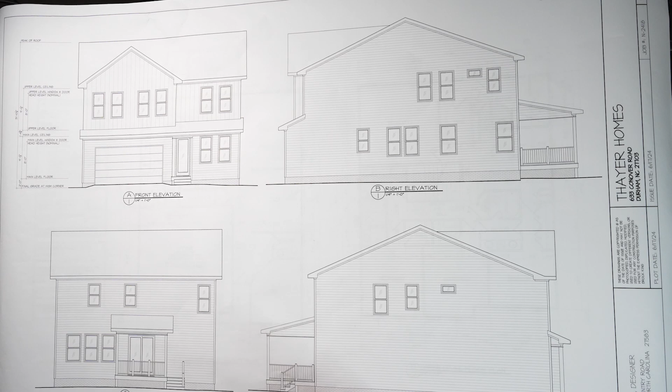This is a set of plans in Durham that we're getting ready to build. We have 3 single family homes and then we have 4 attached homes, so basically 8 units down on the other end. So all 11 of these homes are gonna be somewhat similar. They're gonna have the same garage door, same front door. We're doing brick on the foundation on the front, brick stairs, which I'm gonna note a few of these things. But then on the sides, in the rear, we're not going to put brick.

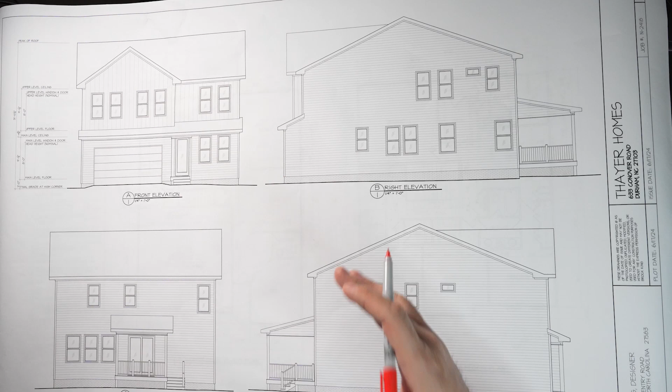So I'm gonna go through this set of plans and I'm gonna redline it, mark it up. Some things that we kind of changed after we did architecture. Now we know exactly what we wanted to do. We've priced it out. These are the changes that we're gonna add in here. So what we're doing is a craftsman style door. So I'm just gonna kind of draw in there that we have craftsman style doors.

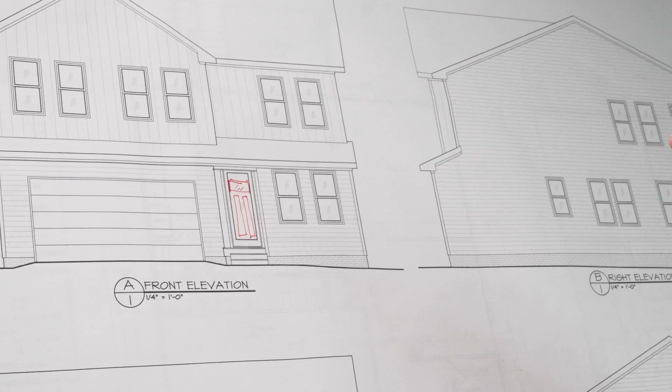So the glass will be right here, and this will be panel. Just so, you know, they're gonna have a selection sheet on that. They're going to see that it's a specific door, but I want everybody to be able to visually see it as well. I also want to make the trim a little bit heavier in the front.

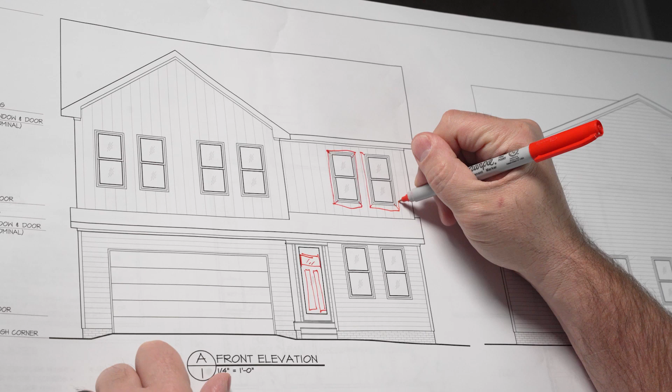So I'm just gonna mark a couple of these windows and I'll just put arrows to make sure that we are going to put a 1x4 trim. It has it on these plans, but it's not wildly visible and doesn't really stand out.

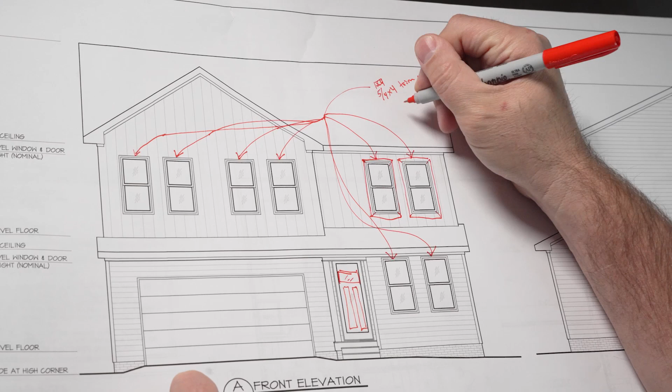So I'm gonna say on here 1x4, actually, let's change that to 5/4 by 4 trim on front windows. Because I don't want to put shutters on here, but I want to give it something. So we'll put that detail.

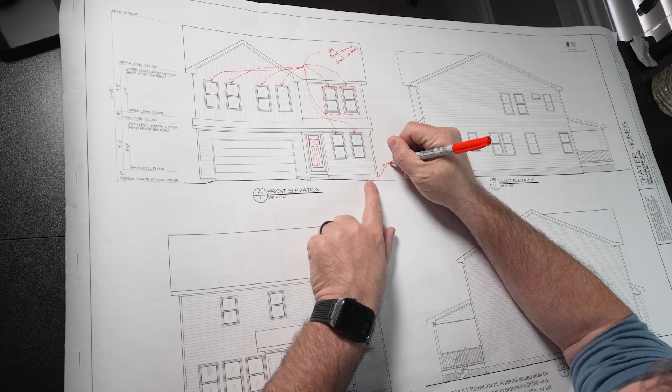I'm going to be doing something with the garage door, but I'm still waiting to get exactly what they selected to get a picture of it. All I have is a SKU, so I'll kind of draw something in there later. So I'm going to notate on here brick foundation, front only. Just put a couple X's on here.

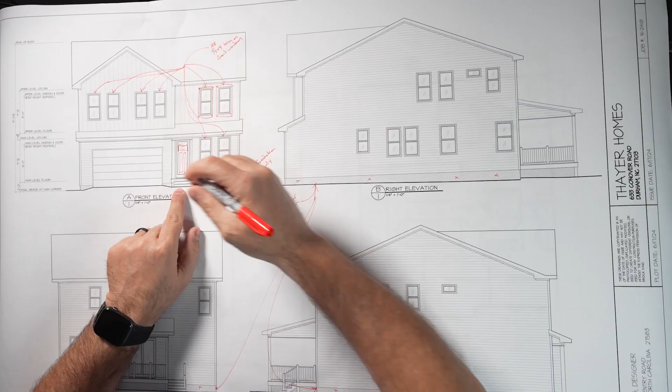On the rest of it, I'm just going to note on one area, and rear if I really want to be excessive. Then I also do want to note that this shows more like a decking, and I want to note that stairs, brick.

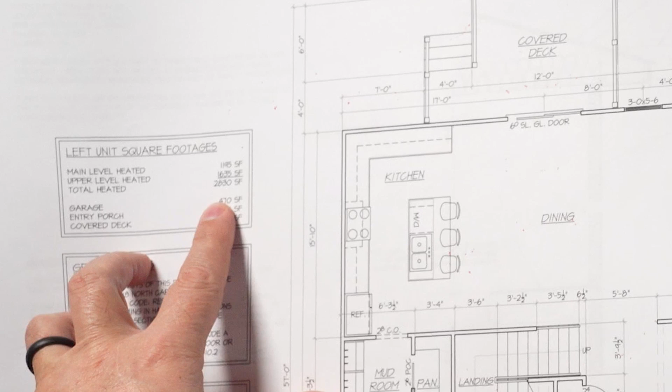So we've made some changes where in the past we would maybe run a chase in the master closet, maybe take the corner of these 2 closets, somewhere, we would chase it up into the attic where we would put our unit up there, bring our ductwork down, because this house is only 2,800 square feet. At 2,800 square feet, I can get away with just 1 unit, and we're gonna put a heat pump in here, so it's gonna be all electric.

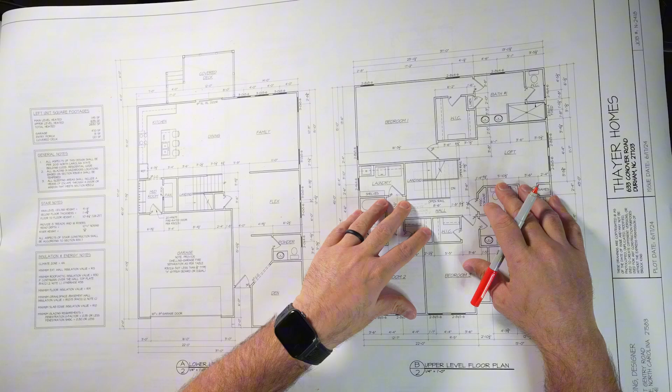And what I do is, if it's in the attic, I will duct down to between the 1st and 2nd floor. In between these floors, I have open web trusses. So if I get it down there, I can get into those open web trusses, and we can drop all of our supply lines and our returns down into the 1st floor. And then from up here, basically all our supplies will be in the ceiling here, and our supplies will be in the ceiling here as well. And the returns will be in the ceiling over here on the 2nd floor.

Well, in this case, now doing the HERS program, one of the things that's going to give me higher rebate money is to make sure that my unit is in a conditioned space. So if I go with plan A, the way I typically do it prior to working with this energy efficient program, then I would have to spray foam my entire roof deck, and that's going to add probably another $5,000 to this size home at least. I haven't really priced it out, but it's easily $5,000 I'm going to be adding to this.

Well, something I do standard regardless is in my crawl spaces, I do a sealed crawl space, and then we condition it. So we drop a supply down there and we condition our crawl space. So if I'm already conditioning one of the two, I might as well not have the extra expense by putting it in the attic, but instead we'll put our unit into the crawl space.

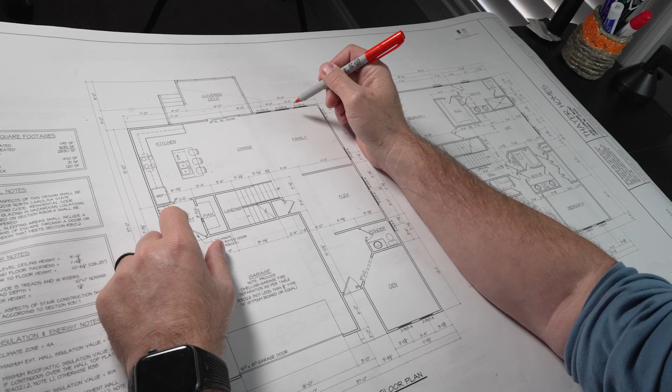All of our supplies are going to come through the floor on the first floor. It'll run up the chase, go into the open web floors, and it will go through the second floor. Then I will just need to figure out an area to be able to get a return in the wall, because we're not going to have a return in the floor. So that's kind of the things I want to start to design. And we could do a lot of this stuff on site, but I want to prep a little bit now.

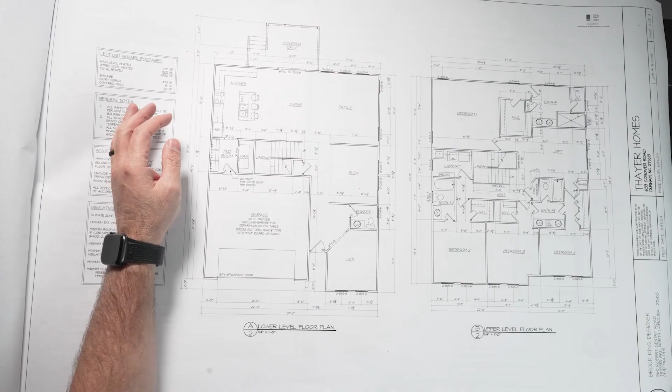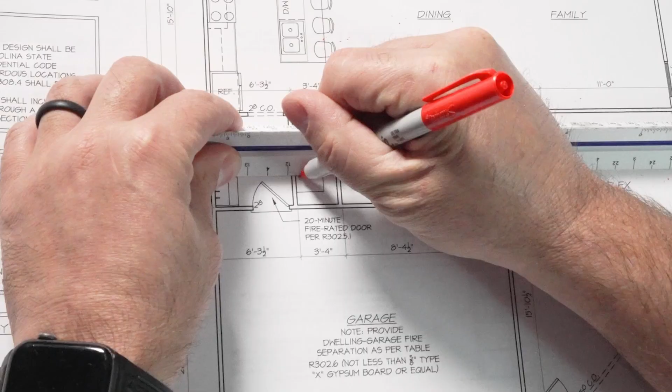And looking at this plan a little bit earlier before I started this, I was thinking this pantry is enormous. It's 7 feet by almost 3.5 feet. So I can take 2 feet of this pantry and have 2 foot by 3 feet and go ahead and duct this right here. Block this off, and this could be a chase. So then I still have a 4.5, 5 foot pantry, which is plenty enough.

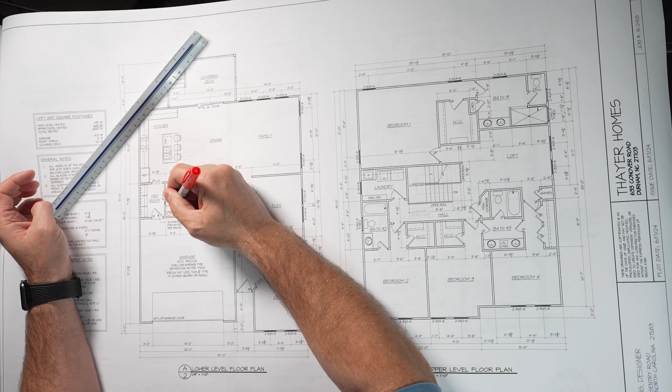And what I'll probably end up doing is putting a small set of shelving right here, because I don't have a lot of depth right here. So I'll probably end up with small shelving right there, and that could be a place where you can put cans, spices, whatever, on this side, and all your bigger stuff will go on these deeper shelves right here. If we have a chase right here, and then we have the garage, on the other side of the wall of this chase, we have the space underneath this landing.

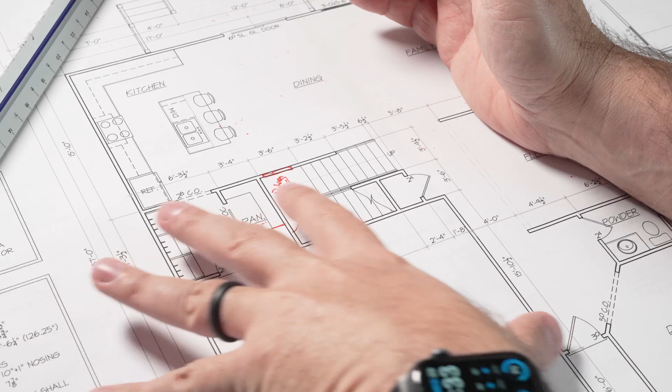Okay, so then we could end up putting a return in the wall right here. They could put a return right here, and I'm just giving suggestions to the field. When they get to the field, they might find a little bit better solution, but I think this is probably the best bet. It puts a return to this nice open space right here, but at the same time, I don't want to lose all of this space under this landing.

So I want to figure out how to utilize some of this for storage, because another thing I'm going to redline in here is an access door. Okay, so when I have an access door from the garage, I'll end up conditioning all of the space underneath here, but I want to be able to have more storage space. I hate losing all of this space.

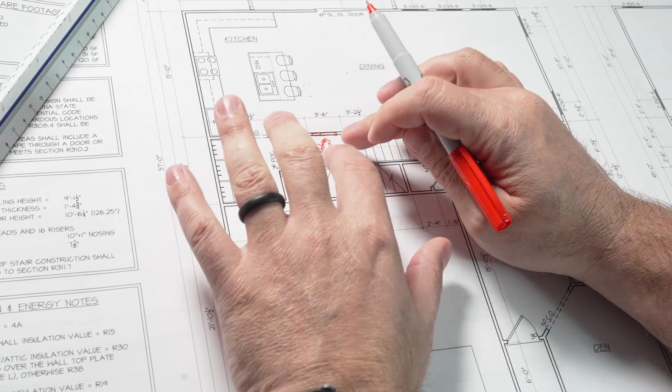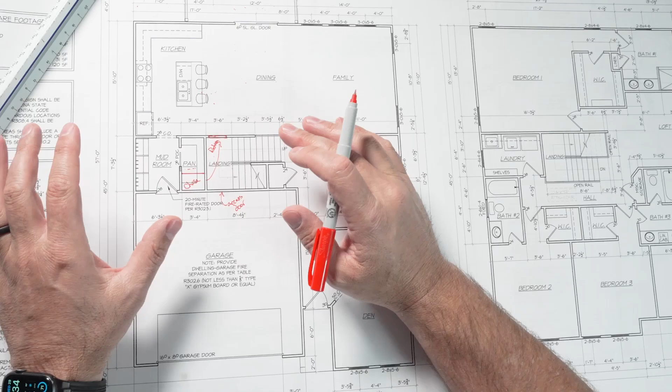So if we're gonna have a duct, maybe we can bring the duct up high and run it underneath this landing, drop down and go into a return. That way we could still utilize all of this space underneath the stairs for additional storage space. This could be a good place to put your holiday Christmas stuff, right? Utilizing all of this space when you can is always a good idea. Buyers love it, okay? So that's one of the things that I'm gonna prep here to make sure that we know that the unit's going into the crawl space.

So I'm gonna put also a note here: HVAC unit in sealed, conditioned crawl space. Another thing I'm noticing here, it shows a cased opening. I do not do cased openings, so I'm gonna cut that out. I like to have it cleaner. I don't like these headers separating rooms unless I have to.

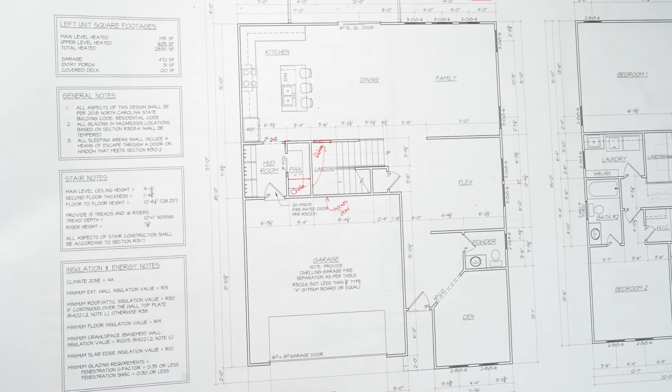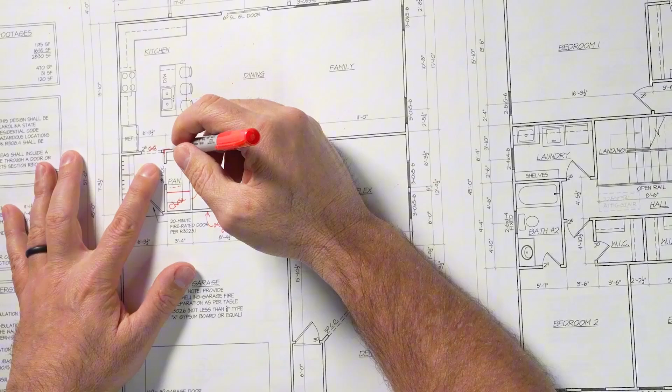So before I get too far ahead of myself here, I'm gonna jump over to my structural plan and just see, and it just has a standard header there, but I can take that. Yeah, there's nothing really affecting me from being able to do that. So I can run all that up above in here. So I don't want to put a cased opening here.

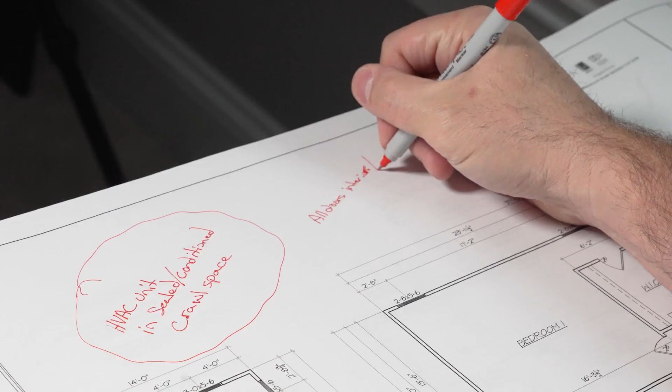So I just want this to be an opening, meaning this ceiling will continue to flow across instead of hitting a header, dropping down, and instead of having this little bump out right here, I'm just gonna have this all be smooth and open. It makes for a nice cleaner look in my opinion. I'm also gonna make a note here that says all doors, interior and exterior, 8.

I'll just put 8-0, so 8 foot tall. All my interior and exterior doors, I do standard 8 foot. So this shows a 6'0" wide sliding door. It's gonna be 6 feet wide by 8 feet tall.

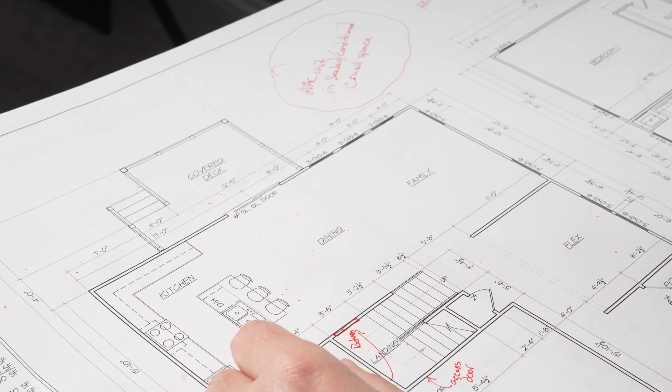Another thing I'm going to add to these plans later, all of my window rough openings. I'm still waiting to get those back from my manufacturer. So even though it says a 2046, 3056, I want to know exactly what my manufacturer of these windows says I need to frame these windows to. So if this is a 2.0, it may say it's 24 3/4 of an inch by 52 3/4 of an inch, for an example, right?

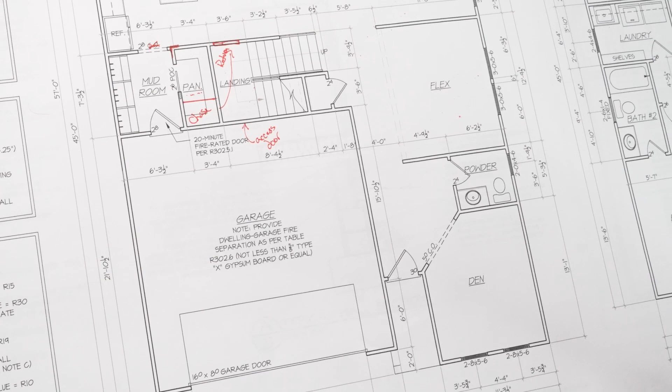And that way when the framers get them right, the project manager checks the openings before the windows show up, they can put everything right in the hole and they don't get any delays and have to come back. The problem with that is it's gonna slow everything down, number one. Number two, let's just say they can't put these 2 windows in because these 2 windows were framed based on this instead of me getting exactly what the manufacturer requests.

And then these 2 windows are just sitting in the house, making it susceptible to somebody coming and stealing those windows, or maybe they're just sitting in the garage and somebody could steal those windows. I want these windows dropped and installed on the exact same day, therefore I don't lose any windows or doors. So I want to make sure that I have that. I will have a note right here that says all my window rough openings.

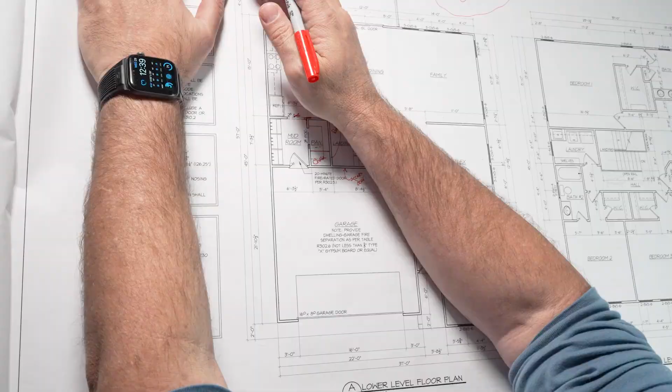Doors, it doesn't matter. This sliding door will matter, but these doors are gonna be standard. Any kind of exterior doors, which I just have this one front door, this door right here, I will get a rough opening on that. So I will mark that over here on the page.

Now, other things I wanna look at: when I was talking to the designer, we just kind of have this flex space and then we have a den. Like, what do we want to do with this space? I've gone back and forth with this whole thing. Do I want to leave this as kind of an open area? Do I want to put a wall? So what I decided to do is just go full wall, and then this will have a header going across.

And if the buyer comes in and they're like, no, I want to close this room off, make it a separate room, they can do that. They've got a header, so they just need to frame down from that point, maybe add the door they want to put in there, the door opening. So I'm just leaving this like that. I think that's pretty much it on the first floor that I see as far as framing details that I want to put in here.

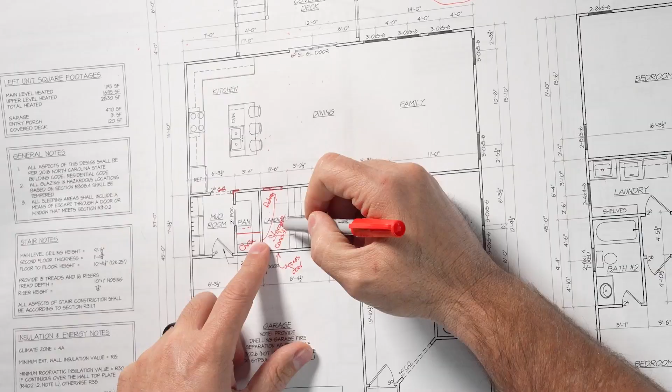If we have an access door in here, I want to note that this is going to be for storage and to condition with insulation. I'm not going to put supplies in there, but I want to make sure that this is all insulated inside here, because normally they would stop the insulation right here. Since we're kind of opening this, I want to make sure that everything is insulated in there.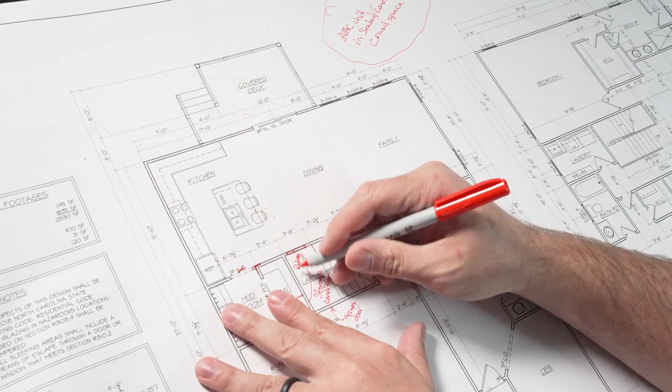So because of that, we'll have a wall right here, and we'll probably just stop it right there. If it doesn't need that wall right there, maybe I'll bring a wall right in here, because once we get in here it gets too small. So I'll put a wall in right there, insulate in here, and drywall inside here to just kind of finish it off as storage. Not gonna paint it, not gonna put flooring in there, but I just wanna get it to at least that point.

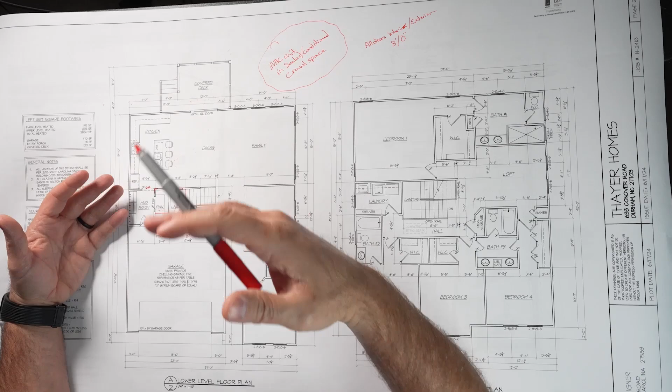The last thing that I wanna look at is my window placements and quantity. I wanna make sure that, if we were putting furniture in here, we have to imagine living here, how everything's gonna lay, making sure that we've got enough wall space for certain things, having enough light, but at the same time not having too many windows, because a lot of extra windows is just additional cost.

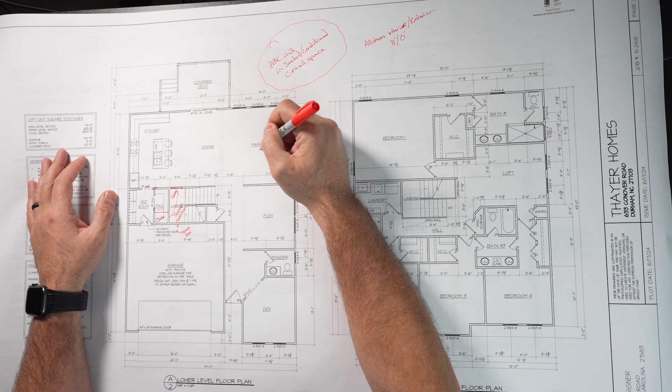So sometimes I'll come through these and I'm like, oh, I don't need this window, this is important, and I'll take windows out. And I've already done this with this plan once, but I just want to look one more time. So family room, I want to have some good light in there. The kitchen, we want to have some good light. Since we don't have any windows over in this area, we've got this big glass sliding door right here.

So you should get plenty of natural light in here. We're going to have can lights, but I want some natural light. We have 5 windows, lots of glass over here and over here. We just don't have anything over here. But I also want to have enough wall space to be able to, you know, I imagine that the furniture, couches, and I'll face this direction.

So this is going to be what we call the TV wall. So I want to have enough space. So I have 10 feet 8 inches from center to center window. So let's just call it maybe 8 foot in between there. We have plenty of wall space.

So in here, we're bringing a twin window right here, single window in this powder room. We've got 2 windows up front. I don't think I want to add or delete anything. I'm good with the first floor. I'm just going to pick that up while we're talking about windows on the second floor.

The master bedroom, you always want to have a decent amount of light, but at the same time, you want to think of headboard wall, TV wall. If I put the headboard wall here, we've got this one window right there. It gives us 3 windows. This is a pretty big bedroom right here, almost 16 by 16. A little better than 16, a little less than 16 here. I want to have headboard wall, TV wall, good natural light in this area. So I'm not going to change anything there.

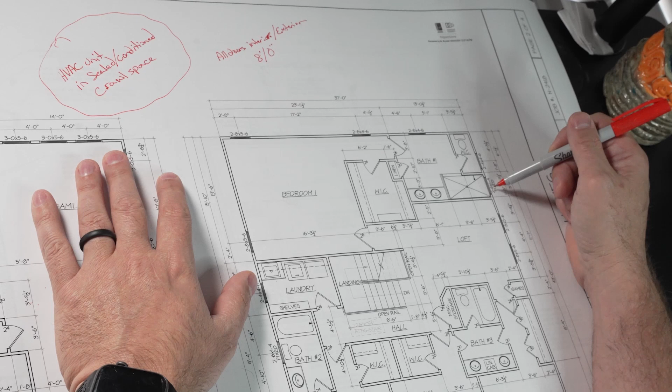I'll make a slight adjustment because we've got 3 foot. Yeah, I'm going to make a slight adjustment here to make sure that we have 6 foot from here to here. I'm going to say 6 foot 1 inch for framing. Okay, so if we have 6 foot 1 inch, once I put the drywall in there, half inch, now we have 6 foot. So I want to have a 6 foot vanity in here to give us a little extra space so 2 people at this area right here don't feel like it's crowded.

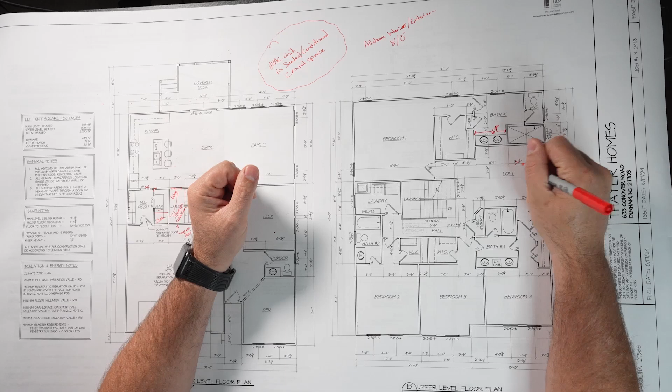So I can shrink this shower slightly, which the shower is huge. It's 7 feet big. As a matter of fact, I might want to add a little bit more and go 6 foot 4 inches to give me the 1 inch for the drywall and a 1.5 inch fill on each side to give me a clear 6 foot vanity. So I'm making that little note. We can shrink this shower a little bit, but that gives us an idea where this wall is going to go. So I'm just going to cross this out so that they reference this right here.

Okay, we've got an open loft area. We've got 2 windows in here. And then the front, is this excessive with windows for a bedroom, having 2 windows for each one of these bedrooms? Yes. I mean, you only need one window, but this is the front of the house. So I don't want to mess with the elevation because this particular elevation, that was the look that we were going for. So I'm not going to take away from there.

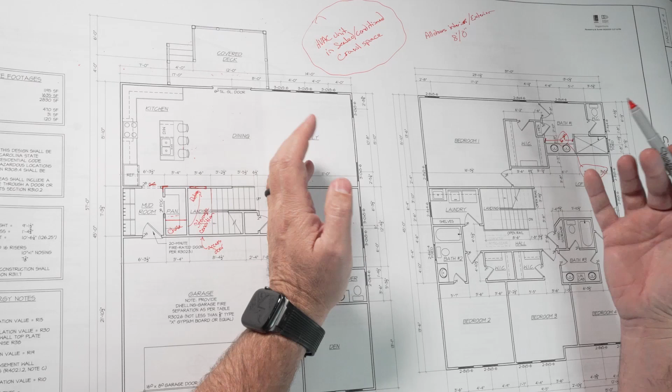We have a transom window right here over the toilet area, which will bring some good light into this bathroom. A lot of times they don't even put any kind of windows in this bathroom. I like to give some light in every bathroom if I can. Obviously we can't do this interior bathroom. Laundry, we have a small window, and then we're right back to where we started. Going through this, I want to look at things like door swings, make sure everything kind of feels good.

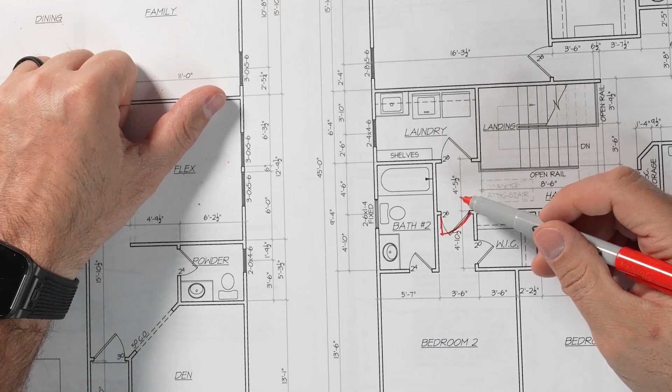I'm going to reverse that swing and have this lay up against this wall. So it won't change anything with the size. That one lays into this wall. So like right here, this door actually could be slightly kind of in the way of this door. And I don't like doors competing against each other, but this door can lay up against this wall. This door is gonna lay up against that wall. This lays against that wall.

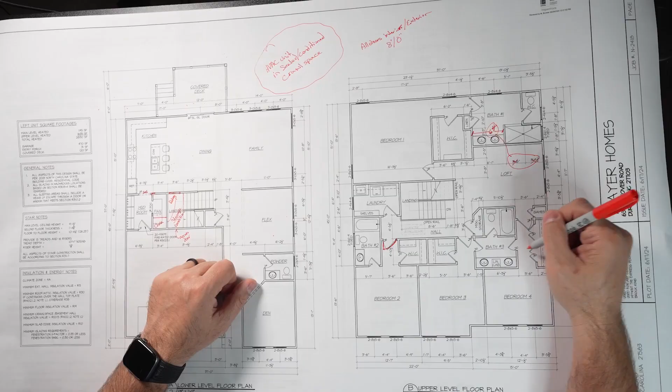Now here I have 2 doors, so I'm gonna leave this one like that because otherwise I'd be right in front of this one if I opened it up this way. So we're gonna leave that. This one goes into this wall. We've got like a little separation. This is a buddy bath. So this bedroom and this bedroom share this bath. So they can come in here.

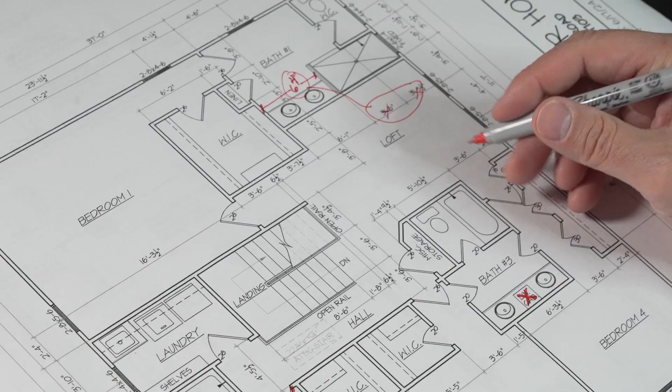Oh, by the way, no linen cabinets on top. My designer loves to put those, but I don't ever put these linen cabinets on top of the counter. I don't like those. So what I'll probably end up doing is making this more of linen. So meaning when we trim this out, I'll put shelves all the way up, and probably do the same thing with this cabinet too. It's like a loft, maybe kid games, whatever you want to call it. I'll just make a bunch of shelving in this closet as well. Nothing I need to mark right now. We've got the double doors for this bigger closet, and I think everything else is good.

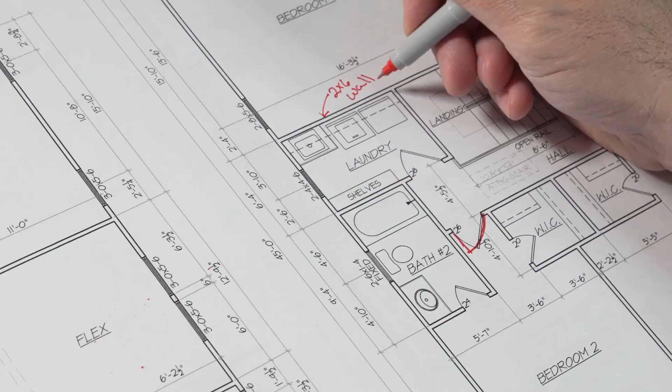This wall right here needs to be a 2x6 wall, okay? And the reason why is because this pipe for both the dryer vent and for the drain in the shower, when you've got a shower box that goes in this wall, it's big, and so a 2x4 doesn't quite catch it. So I'm gonna wanna fur this wall into the laundry room because I don't wanna bump out in this room. So I'll fur this wall in to make it a 2x6 wall. And that way we have enough space for that.

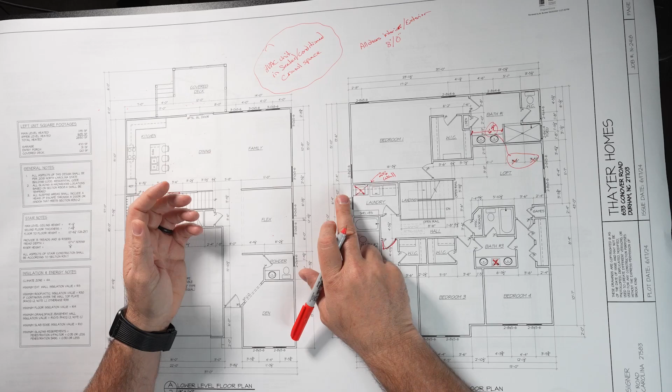This right here, I'm not doing the sink. Again, something my designer likes to put in. I usually have them write optional on there, just in case we pre-sale and we want to put it. I'm gonna say no unless a buyer comes in and says that that's something that they want, and then, you know, if it's soon enough before we do any kind of plumbing, I can do that. But right now, what I'm trying to accomplish is just kind of give them a cabinet right there with a countertop. So we have our attic pull down stairs right here.

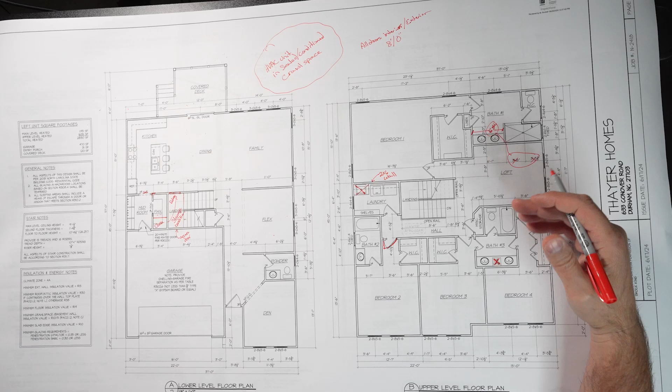So there's not a lot of redlining in here, just a few little items that I want to make sure that we catch before we start building this. Anything that might affect framing or kind of the systems that we decided to design once we went in here. So we have the attic stair door that'll pull down this way, and that is it.

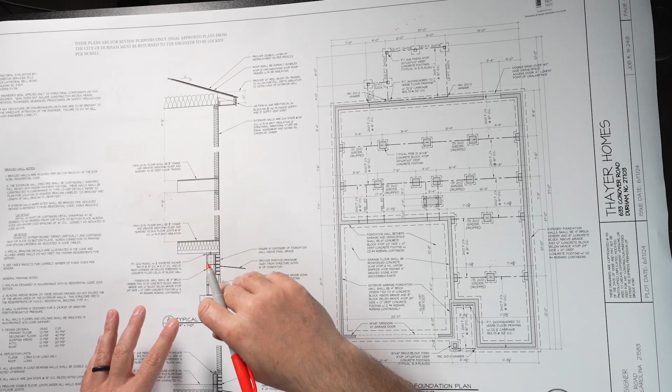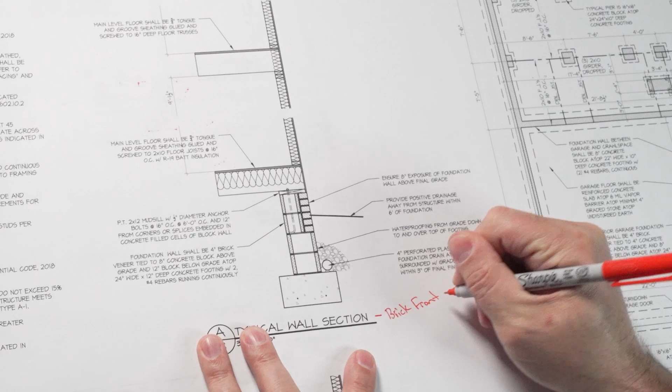Okay, next right here. So some of these details, I have a letter from my engineer, because when they come to do the inspection, if it's not per the inspection, then they'll fail the inspection. They'll say it's not like this, you need to have a letter from your engineer. So you want to make sure you're proactive, not reactive, and failing an inspection and losing time. So this detail will be typical wall section, and I'm just going to mark on here brick front only, see engineer letter.

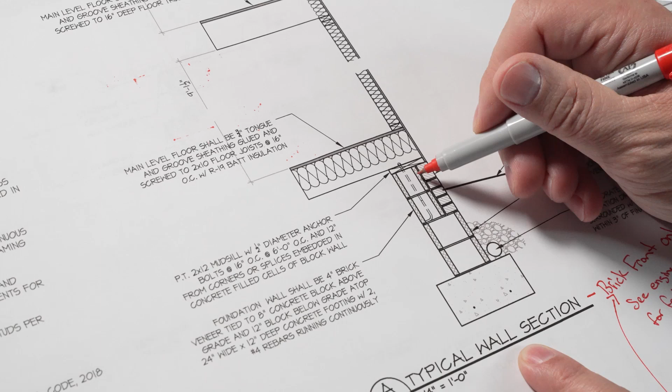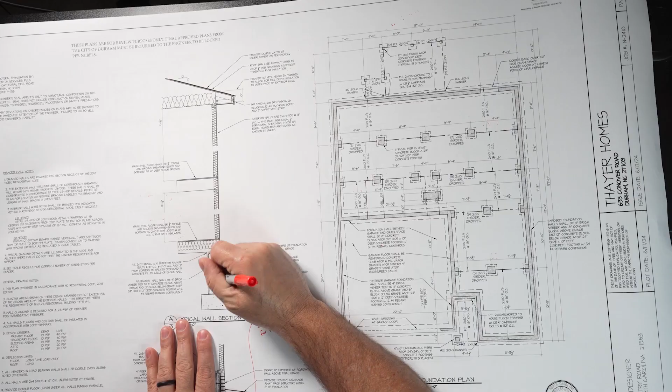Okay, yes, that's 24 by 12. I only need to have 18 by 8. So this footing can be smaller, which is gonna save me money at the end, because I don't need a 12-inch block to support the brick. So this is all gonna be 8-inch block concrete, and this detail will only apply to the front. Okay, so the other three sides, it'll just be 8-inch block coming down. So I will have this footing on the front, but on two sides and rear, it's just gonna be 8-inch block. I won't have that brick, therefore I don't need this size footing. It'll be 8 by 18.

Now moving over to our foundation plan, again, these notes will also take place in that letter. So I'll point over here too, because our footer will not be that big. Another thing is we are putting no piers in this house. So our truss company has designed a set of what's called top chord open web trusses that allow to span all the way across. And then I think it goes this way all the way through. So we will have the truss drawings to show that we don't need this, and it spans all the way across. So see floor truss detail pages.

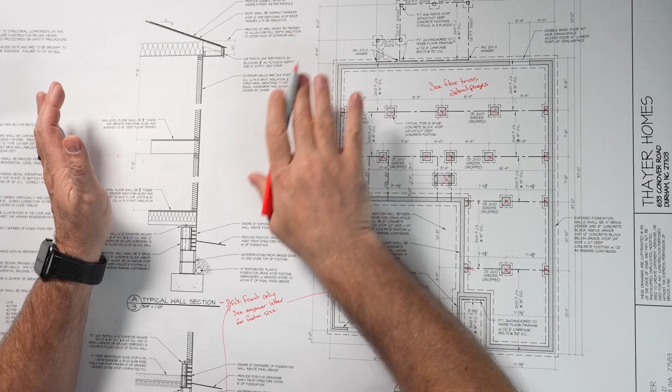I have a 10 by 12 deck with a little landing and stairs going off of there. Something I want to note here. So it says that this is going to be framing right here. That's it. I'm going to put concrete.

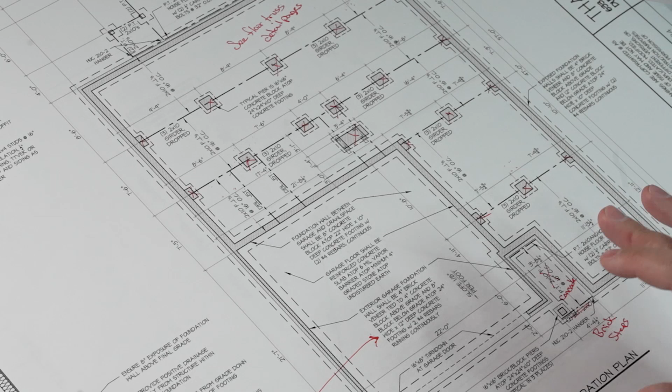So we'll have a concrete porch with brick steps. So I just want to remind from what we have on the front page there, because the framers will look at that, but then the foundation guys, they're going to be specifically looking at this page. So I want to make sure I have that detail on there for them. All that's wood, that could stay.

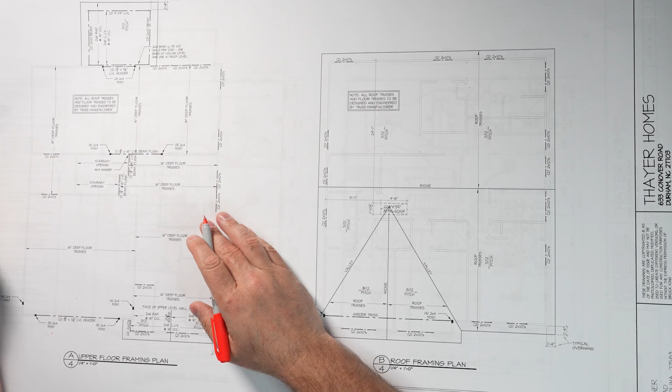Last thing is looking at structural, just seeing if there's any red flags here. Nothing is any kind of red flag. So this wall detail where we have wall on the first floor, remember that room that said flex, and then I have a header going across. Let's just say I wanted to remove all of those walls. I would have to just put a column right here.

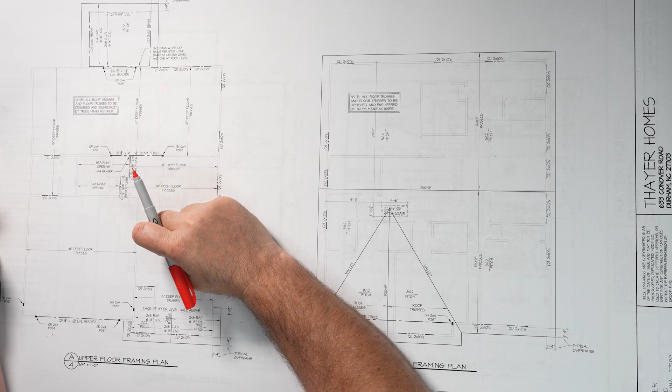Well, I wouldn't be able to move this wall because part of that is part of the powder room, but let's just say I wanted to remove that and this, or make it a knee wall, whatever. I would still have to have a column right here because I have a load point right there in that corner. So we'll just end up insulating this whole ceiling on the second floor.

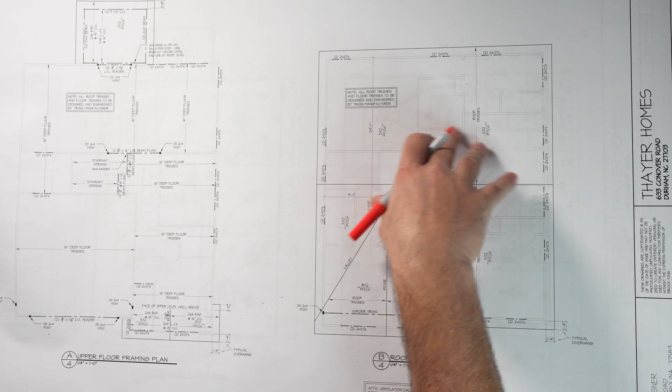Because of the pitch, because of the way this goes, this will probably all just be blown-in insulation up in the attic. So we have blown-in insulation up here, no batts. I don't think we're gonna need any batt insulation whatsoever.

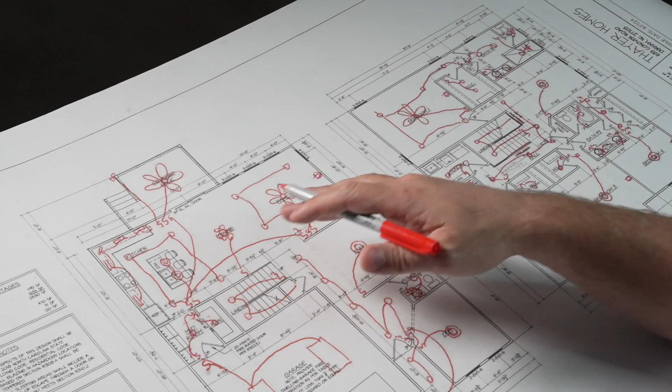All right, and then the last thing is going to be our electrical plan. Electrical plans show the switches, which light they go to. The only time we mention outlets is if it's like a TV wall and we want to put it on a specific wall. If you notice in the different bedrooms we have that TV wall. Can lights, if we're doing like a ceiling fan, or if it's just a flush mount fan or flush mount light. So that's our under cabinet lights. So basically the details for the electrician to know the different things that we want.

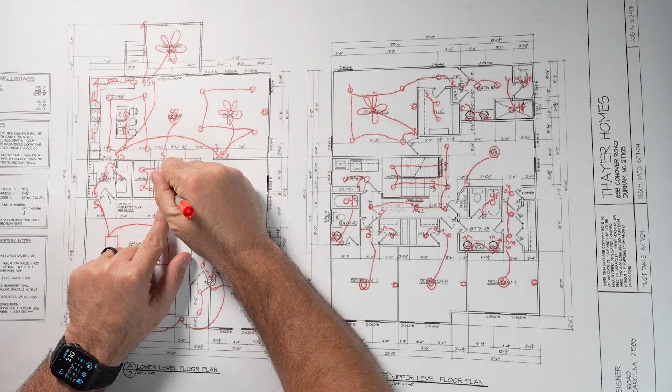This will be a coat closet with just one shelf going across. Here I'm gonna put my data panel in there, and then I want to mention on one of these other pages up here in the beginning that I want my, we'll put an arrow, water main shut off. So water main shut off, we'll have our data panel, On-Q panel, whatever you want to call it, in here. And then this is the coat closet, and we'll have a shelf with a rod up top, and down below we'll have these other things.

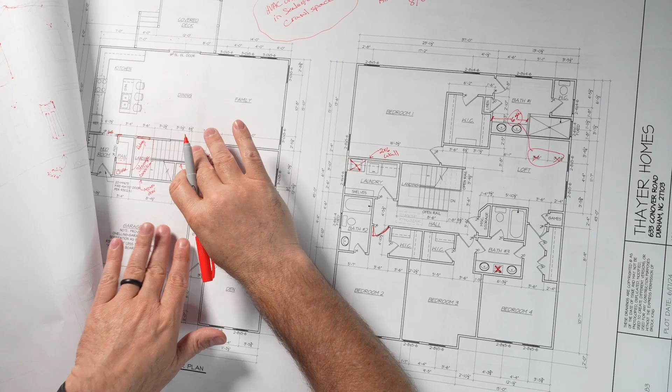I think that's it. This is kind of some of the things that we do to prepare for these plans to go out into the field. So these are some of the final details that you as the owner need to be doing before you send it off into the field to your project manager or somebody on your team, because you don't want to have regrets and start calling your framer over, hey, let's change this, let's do this, after everything's framed, because that's just going to cost you time and money.

So the more details, the more preparation that you can do before everything goes out in the field, the better. So typically I do these red line plans, and then the next step is going to be a pre-construction meeting with my project manager, make sure that they understand it. They may see, hey, what about this, what about that, different things that maybe I didn't think of. And we'll go through those and make sure that we have these plans marked up before it goes out in the field to build. Hopefully all of this makes sense to you.